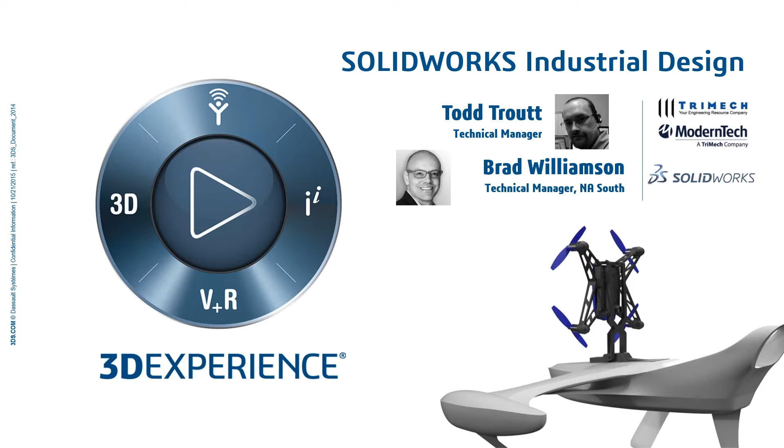Well, I'm going to kick things off if you don't mind, Todd. And before we jump into the product demo, I wanted to first introduce you to one of our customers, Center for Advanced Design. They're based up in the Minneapolis area. Center for Advanced Design, CAD, they are product design specialists. What they're known for in their area is being really creative, very flexible, very responsive to their customers. They do everything from product development through manufacturing.

Now, they are avid SolidWorks customers of ours. They've been loyal SolidWorks users, but as industrial designers, they also use a lot of other tools. They use other sketching software, they use other surfacing software, just anything that they need to get a job done for a particular client.

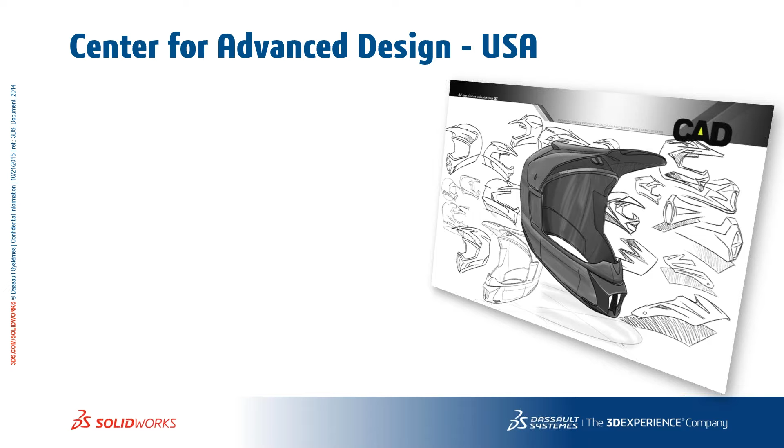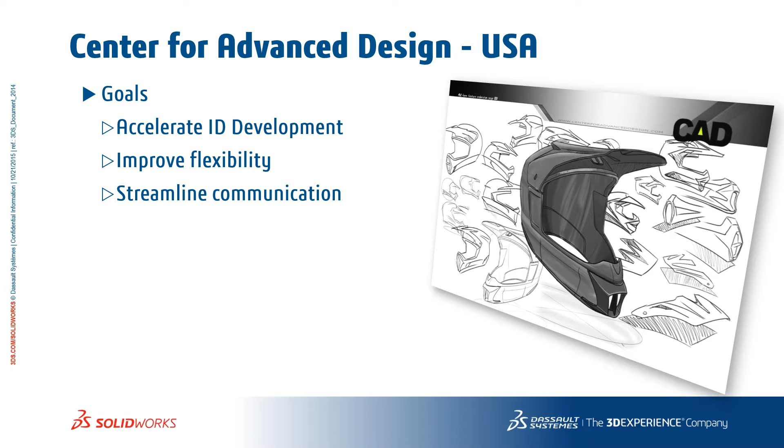So we approached them about a year ago to be early adopters of SolidWorks Industrial Design before this product even hit the market. And when we met with them at first, they identified some bottlenecks in their process and some goals that they wanted the software to do for them. Most importantly, they wanted to find a way to accelerate their industrial design development cycle. They wanted to improve their flexibility and streamline communication internally and with their clients.

And Marc McCauley is one of the co-owners there. He told us that we kept looking for a better solution for bridging the gap between industrial and mechanical design. Now, we're going to come back to Center for Advanced Design at the end of the presentation, and I want to give you a little update on how they made out with their pilot project.

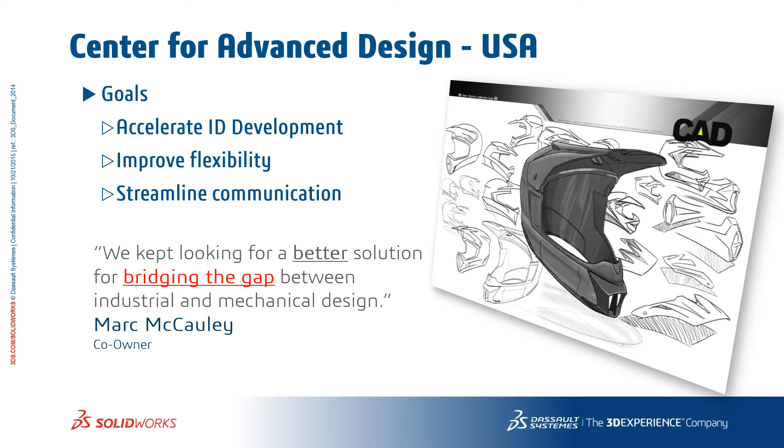Now, before we began the development of this product, we did a lot of market research. We talked to a lot of our customers who do industrial design and got their feedback. We got their thoughts on how they're currently using software in the industrial design process. We repeatedly heard that they use lots of different pieces of software, sketching, surfacing, communication tools, and those tools don't necessarily talk very well together.

They also told us that doing complex modeling in a parametric modeler like SolidWorks can sometimes be kind of tricky, take some advanced training and some advanced skills. And everybody we talked to told us that collaboration and communication was sometimes a challenge, and that's especially when we're dealing with companies overseas, maybe for doing manufacturing where our time schedules don't match up, or maybe we even have language barriers.

So we took all that feedback and we set out to develop a new application, SolidWorks Industrial Design, something that would be complementary to SolidWorks. We wanted to be able to do a few different things. First of all, to be able to model freely without the CAD constraints of traditional parametric modeling. We wanted users to always be connected to their data so they could access it from any device, any location.

And we also wanted to find a creative way that they could harness social media trends and a collaborative type of experience where the internal and external stakeholders in a given project, maybe the team members, maybe the clients, maybe even the suppliers, could all communicate with each other on a single platform. And finally, we wanted a product that was a complement to SolidWorks, so not yet another disconnected application in that process.

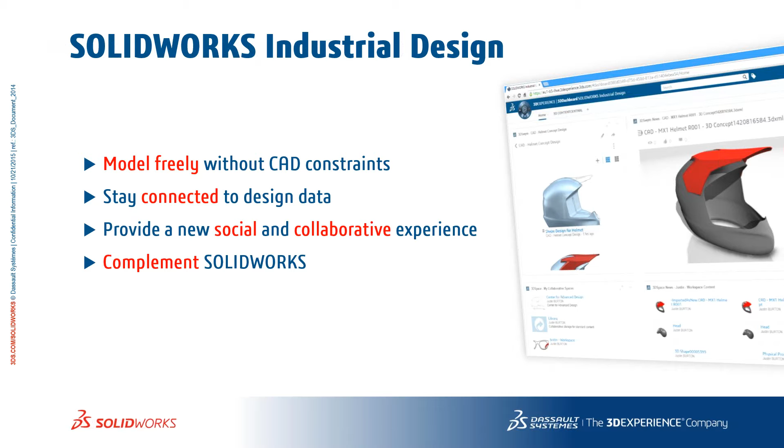So many of our customers gave us a similar feel for what their typical industrial design process looked like, and it was surprising how similar people's processes are. Conceptual design almost always starts with some kind of a hand drawing, hand sketch. That step is probably never going to go away. And the great thing about hand sketching is that it's very low cost. You can try out lots of different ideas on pen and paper, or maybe a piece of software.

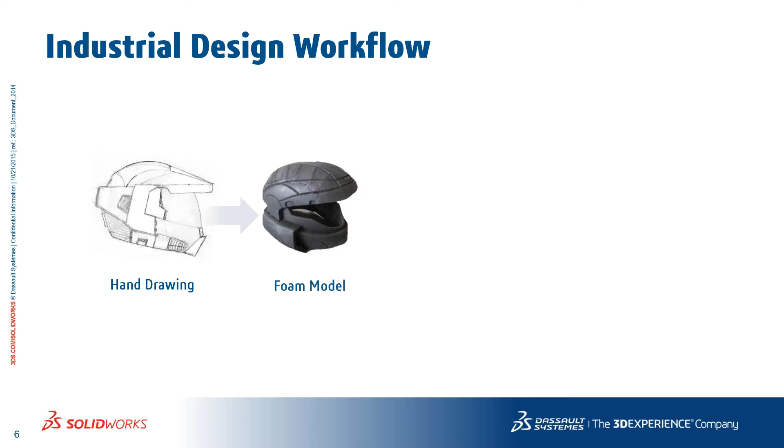Now, one or two of those concepts are generally going to float to the top and become the most popular, and then we might commit to a physical prototype, maybe a foam or a clay model, maybe even a 3D print. Probably we'll try to do some kind of a 3D model of that, maybe using some kind of surfacing program to make those complex shapes, but inevitably there's going to be a parametric CAD solution at the end of this for detailed design. We hope it's SolidWorks, and for most of our customers, it's SolidWorks.

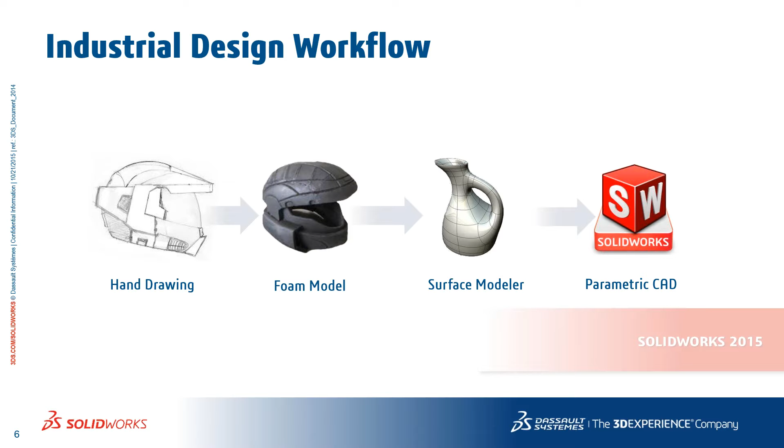The challenge to this workflow, though, is that you've got a lot of disconnected solutions on the front end of that process before you even ever get into doing the detailed design. We're using lots of pieces of software, lots of disconnected processes, and so that's what we thought we could affect: that part of the program by making one single piece of software that would simplify that workflow.

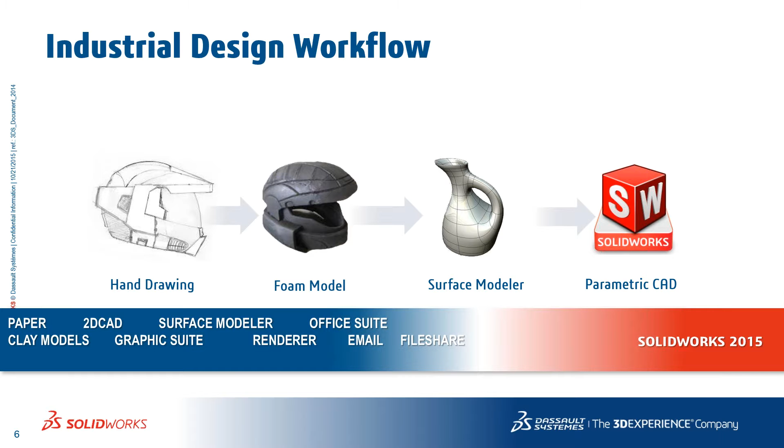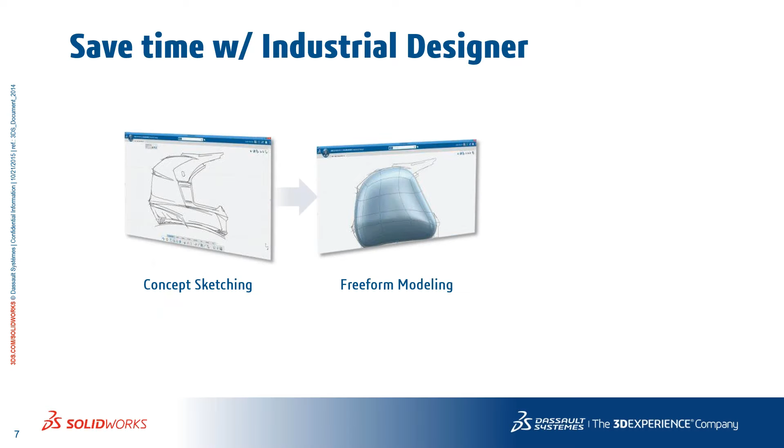So what we propose to do is accommodate many of those initial steps in that process. So you can do your concept sketching freehand. You can do your freeform modeling, even some parametric modeling, but then have a smooth on-ramp into SolidWorks for finishing out that detailed design. So the goal here is a nice smooth workflow, two complementary apps that will talk great to one another and really minimize the set of tools that are involved there.

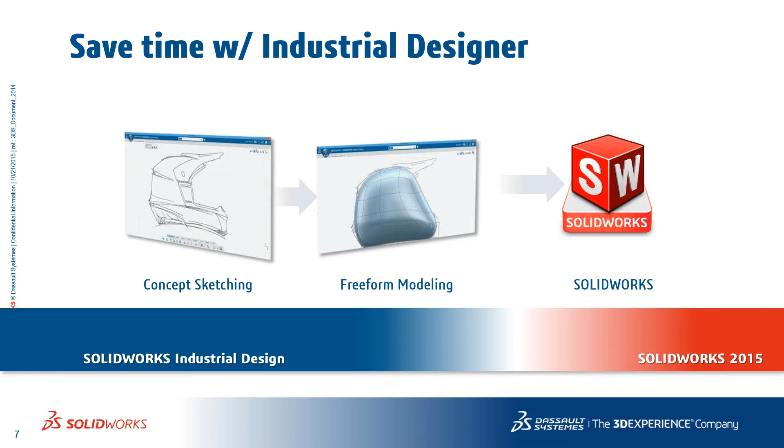Thanks, Brad. So in the next few minutes, what we're going to have Brad do is demonstrate this typical industrial design workflow, and he's going to come up with an ergonomic and stylized design for a mouse, for just a normal computer mouse. So he's going to take you through those 4 steps. He's going to spend about 5 minutes at each step along the way. But first, he's going to need to sketch out some ideas, like he talked about, the hand sketching type of thing that was traditionally done.

After that, he's going to be able to go and sculpt a freeform shape based on those 2D sketches. And then after he has the 3D model, he's going to be able to share that design concept and look for some feedback with a collaborative team. And after that, he's going to be able to refine the details for a production model. The goal of the concept phase then is to answer the question, will it work, and what is the best idea that we can get to move forward before we're investing time in the detailed CAD model.

All right, so to get things started, Brad's going to begin the project with some basic ideation sketching. The same kind of thing that you typically do with a paper and pencil or pen, or maybe a standalone drawing software. Only this time, he's going to use SOLIDWORKS Industrial Design connected to his tablet to do some freehand sketching in a 3D work environment. Brad, go ahead and show us what you have in mind. Yeah, I'll be glad to jump in and do that.

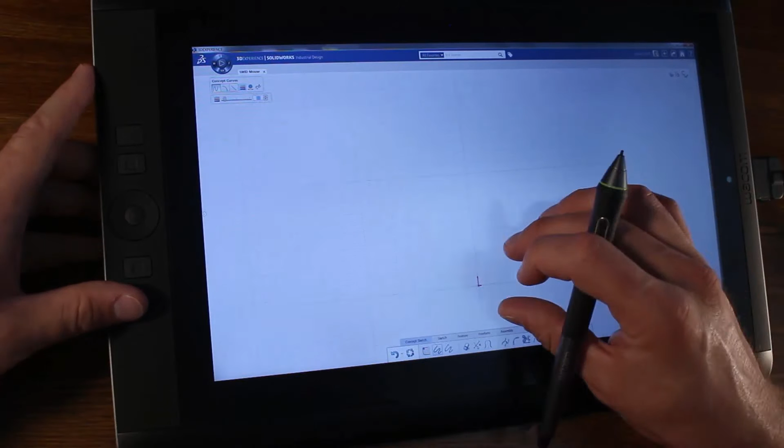Of course, the software needs a Windows computer to run on, and the tablet will then serve as my secondary monitor. So I'm going to jump in, and I've got a webcam showing my tablet in use here, and you'll see me just start sketching. I'll just use some touch gestures to manipulate the paper in the workspace, and then just use the stylus to start roughing in some hand sketches.

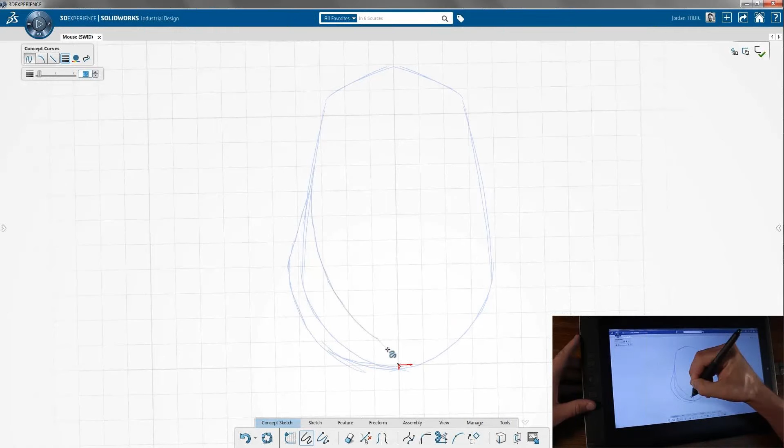Now, I can take advantage of some software accelerators like mirroring and erasing and things like that to make it go a little bit faster. Let me split the screen now so you can see sketching in Industrial Designer, and you can also see that the tablet's still in use there. Just rough in the basic shape here. If I make a mistake, I'll just flip the pencil over and it becomes an eraser. Or, like you're familiar with in any sketching software, we can just swipe over some of those strokes and get rid of them. Want to also add in a little bit of detail here where I think the button profile is going to go, and also sketch in what that wheel is going to look like.

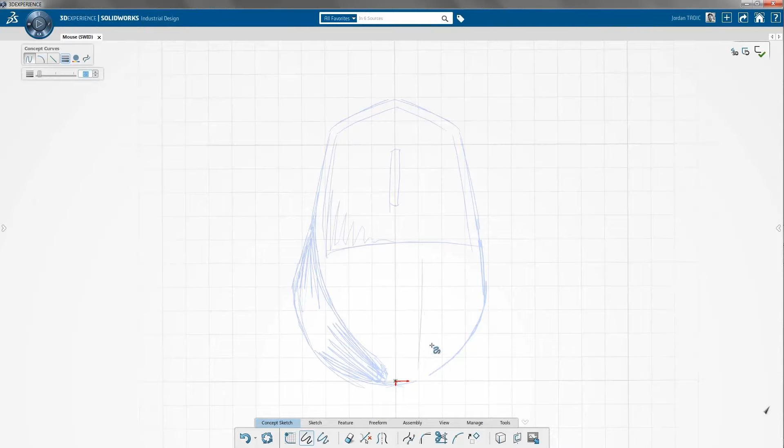Just rough in a few more strokes here, maybe scribble a little bit to imply some texture, some shading. Give it a little bit more of a stylized type of a look. That's looking pretty good. So we're just roughing in the shape here, but what I'll do next is change my pen color, change the pen weight, and now I'll come back over those rough strokes with a bit more confident trace strokes here to give it a little bit more form. Now, I'm always sketching in a 3D mode, even though we happen to be projecting on a single plane.

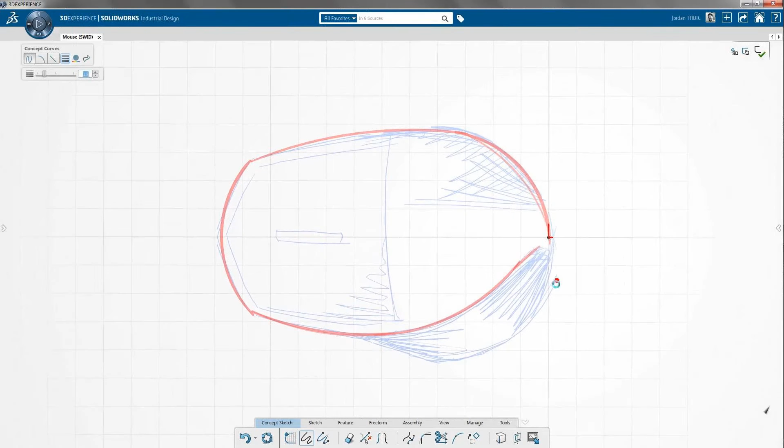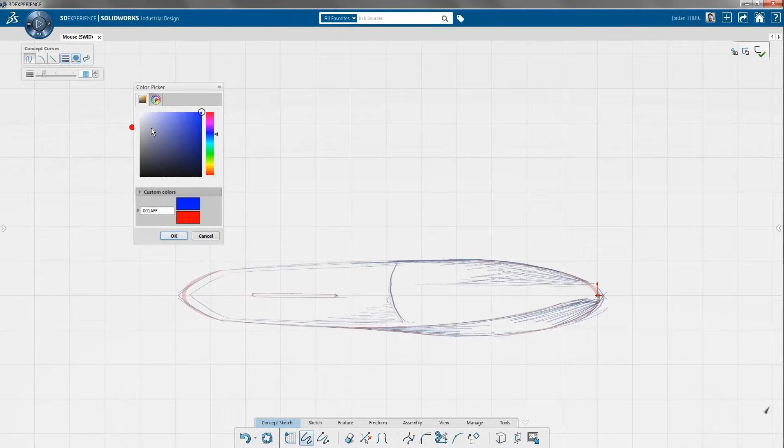That makes it really nice for being able to rotate around and get any kind of view that I want. The tablet is great. It's pressure sensitive, so it's really capturing the feel that I want to capture. Let's see. I'll flip over into a side profile here, and draw another sketch. And what's cool about this is sketches work basically like layers would work in any other kind of a drawing application. So I can have multiple sketches that represent either different positions or even different concepts.

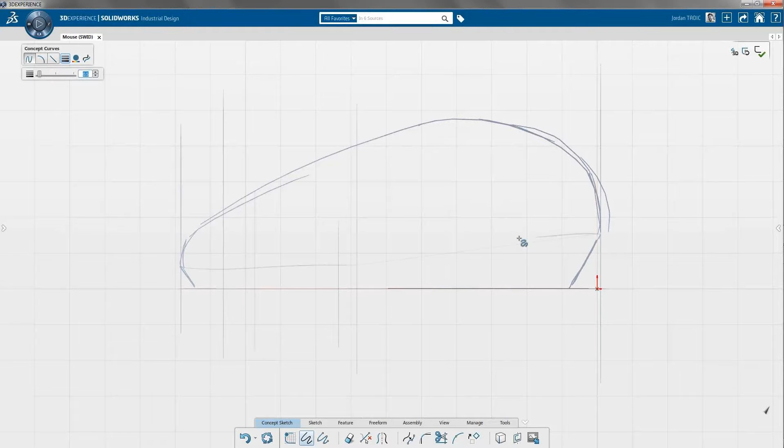Now to get this side profile, I'm just going to draw in some vertical lines, and that gives me some reference locations. Now I'll sketch in the side profile here, what I want that to look like. That's pretty good. I'll kind of rough in what that parting line should be. And then we're going to need a thumb groove on one side. Let's imply a little bit of contour, a little slope there, get rid of some of these mistakes. And then once again, I'll go back to that red pen with a little bit thicker weight and just add a little bit more confident, bolder strokes here.

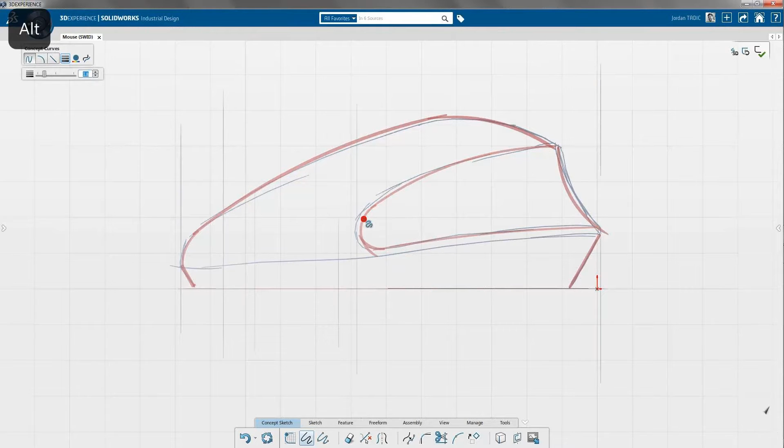And I also have some sketching aids too. So if I hold down modifier keys like Alt, for example, Alt will snap to perfect arcs and circles, and Shift will snap to perfect lines like you're accustomed to in other drawing software. So we've got now two pretty decent orthographic views. I've got a top view, I've got kind of a side view, and if I rotate out to a little more of an isometric view, it almost looks 3D, even though this is just 2D sketches. And this might be a good starting point just to show to the customer and see if we're going in the right direction.

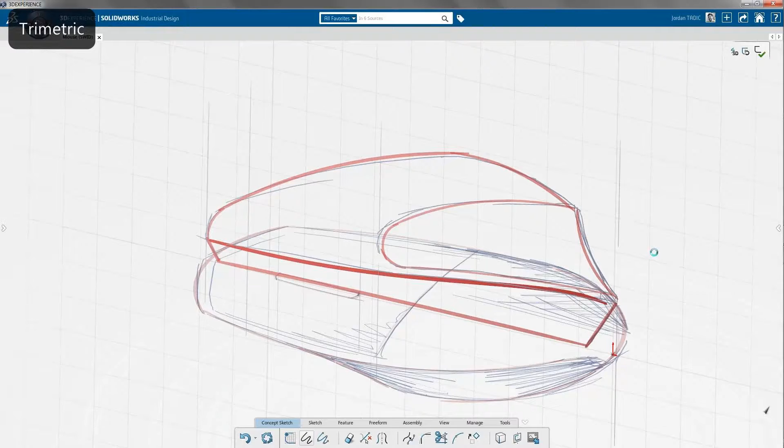All right, cool. So, that was just, I got to say, some good sketching and nice job there on the good-looking mouse, really. But in just a few minutes, Brad's been able to rough out those ideas or those ideation sketches. It's kind of like a digital napkin or maybe a design notebook that you would have.

And if wanted, you could take it a little step further. You could incorporate photos, image files, maybe even some 3D geometry. It's no problem for SOLIDWORKS Industrial Design. Sketching then is fast and easy, and it means you can quickly capture your ideas and just as important, create multiple concepts. Now, before

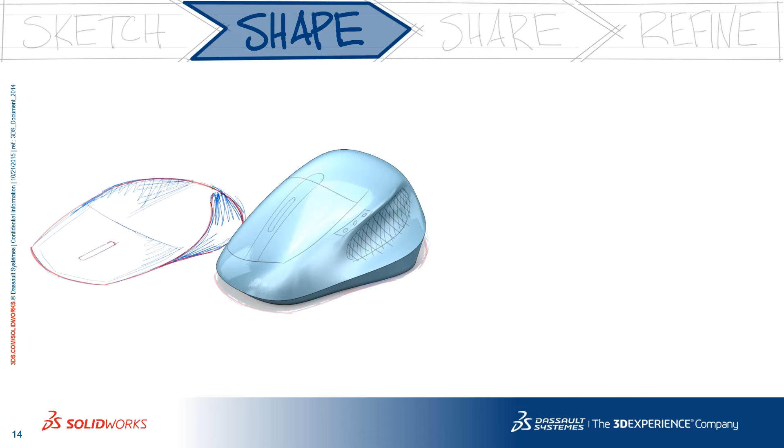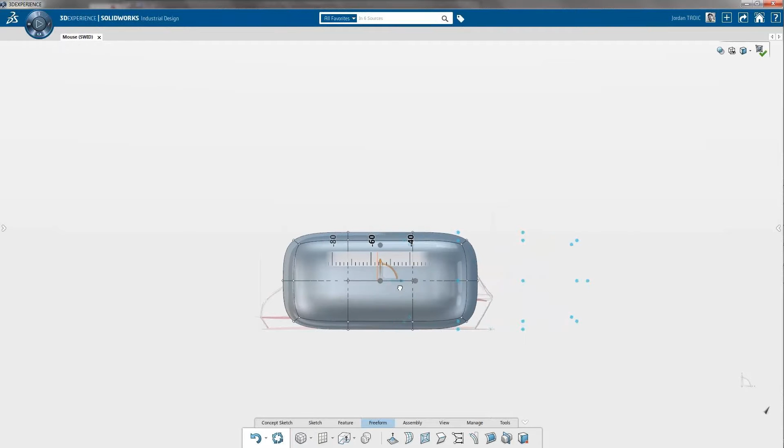Sketches, those are pretty useful, but if we want to really visualize this in 3D, we need to get some kind of a model. Now, what's different about freeform modeling in Industrial Design versus traditional parametrics is that we don't have to use a lot of complex surfacing. Instead, I'm just starting with a basic shape like this cube. And then I can just manipulate the cube by translating it, scaling it, pushing, pulling, and just watch how quick, with just a minimum number of moves, I can basically get that bar of soap kind of shaped into a mouse. It's going to look pretty cool here.

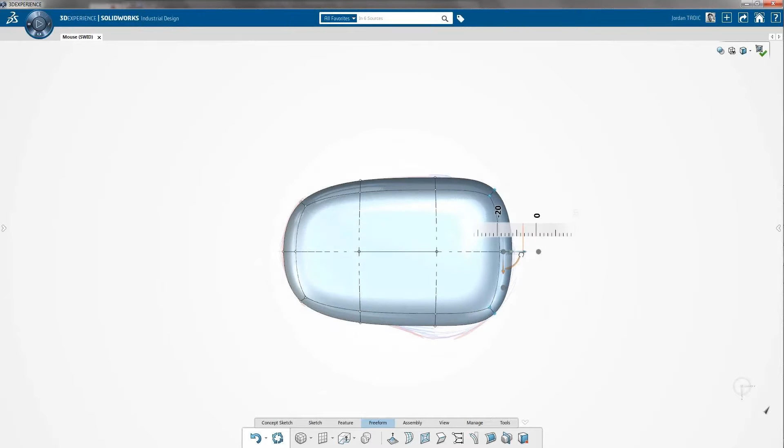I'm going to use the triad. You'll see me use this triad a whole bunch of times. I'm just going to grab some different control points and push and pull on it. That tool, that one tool, lets me scale, rotate, and translate, all with the same interface. So I don't have a lot of complex tools to learn. Because typically an industrial designer, they're not necessarily a CAD expert. They don't spend all day modeling in 3D. They do a lot of different types of jobs. So we wanted a tool that was easy to use.

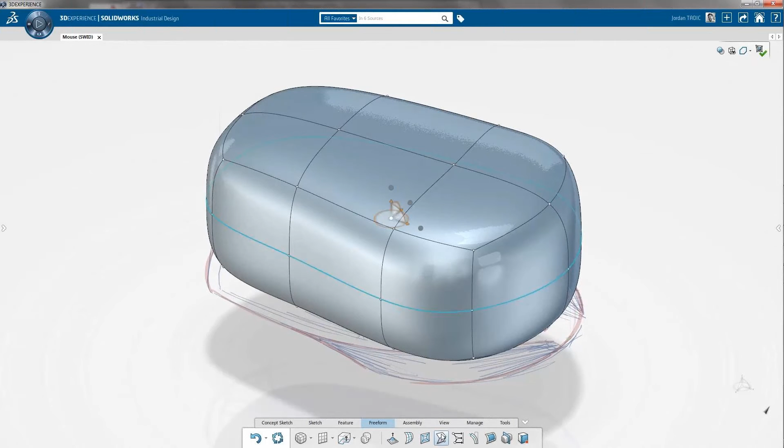Now I've got the top view looking pretty good, and everything's nice and C2 curvature continuous. But sometimes we want a hard edge, like where we have a parting line. I want a nice hard edge along the bottom, for example. So I'll just pick on the edges around the bottom of my block and turn on the crease feature. And so the crease just makes it into a nice hard edge.

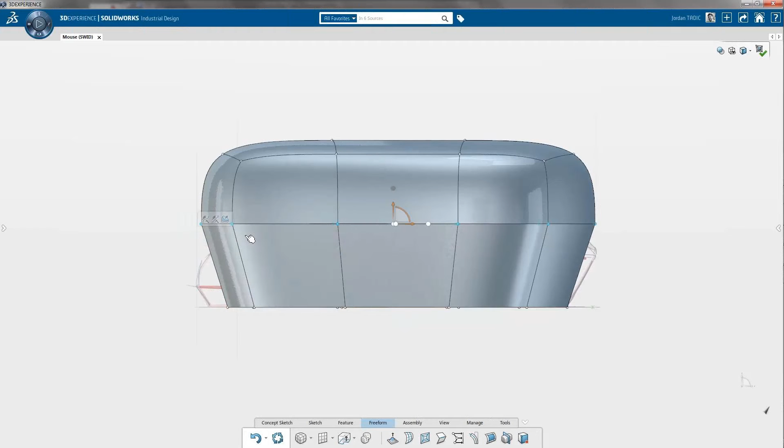That's great. Now if I look at this in a side view, I want to get that nice beveled type of a profile. So I'll grab that scaling tool right there on my manipulator, grab the parting line, translate it down a little bit, and I want that to have a little bit of a swoop to it.

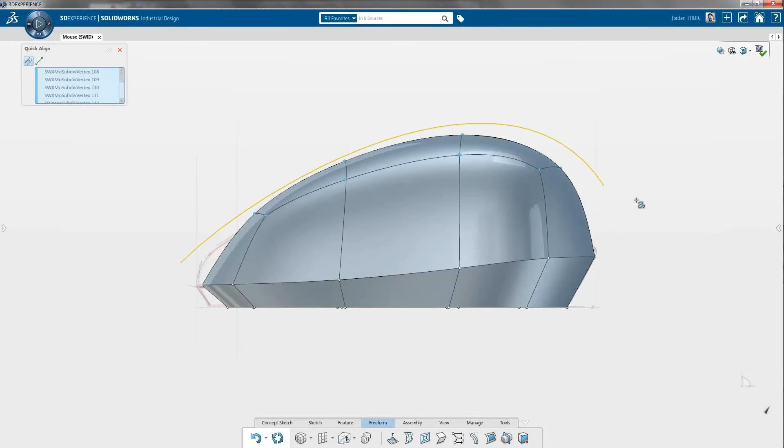So watch this. I'm going to use this patented tool called Quick Align. Quick Align lets me swipe with my pen here on my Wacom tablet, and whatever I draw, it snaps the freeform control points to my pen stroke. And it stays active, so I can really iterate and try out lots of ideas really fast without having to keep reselecting and going back to the command.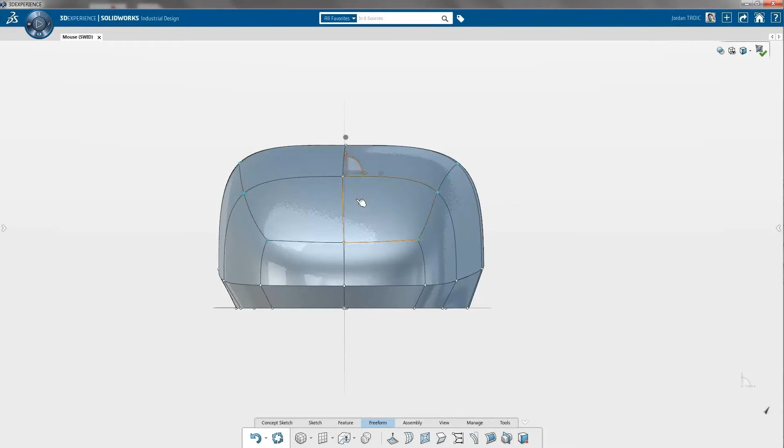So after a few little pushes and pulls on this, I'll make a couple more fine adjustments, and I just continue working my way around the model. Let's go to a side view, grab a few control points, use that manipulator. I'm going to orient the manipulator here so it's sideways to the screen, and then I'll just scale that in a little bit.

There we go, got a nice taper to it. Drop it down just a hair. Everything is maintaining a nice C2 curvature continuity also.

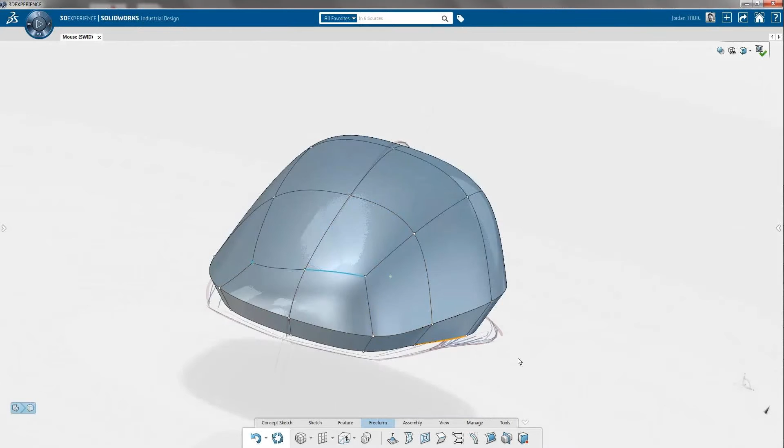So I've got kind of an asymmetric design happening here. We want this to be a right-handed mouse, no offense to left-handers out there, but we want it to have a little asymmetric styling here. Just continue pushing and pulling on this a little bit.

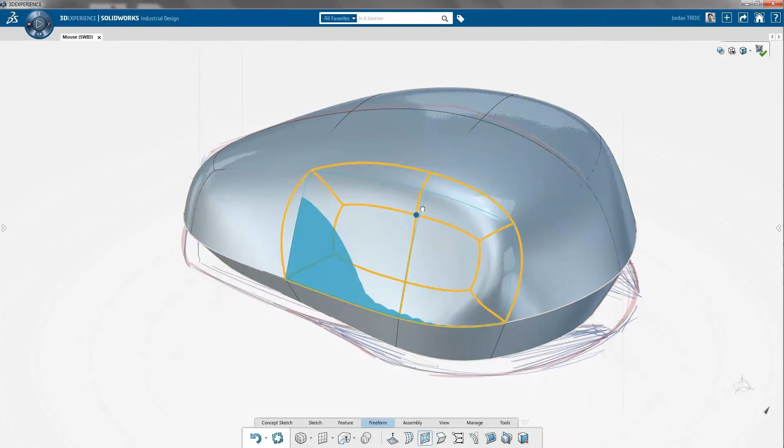You can see how I was able to just, with a few moves, get that style kind of matching the hand sketches underneath. Now I need a button or a little thumb groove recess here, so I'm going to turn on a tool called Subdivide. And what that does is takes those larger faces and breaks them up into a series of smaller faces.

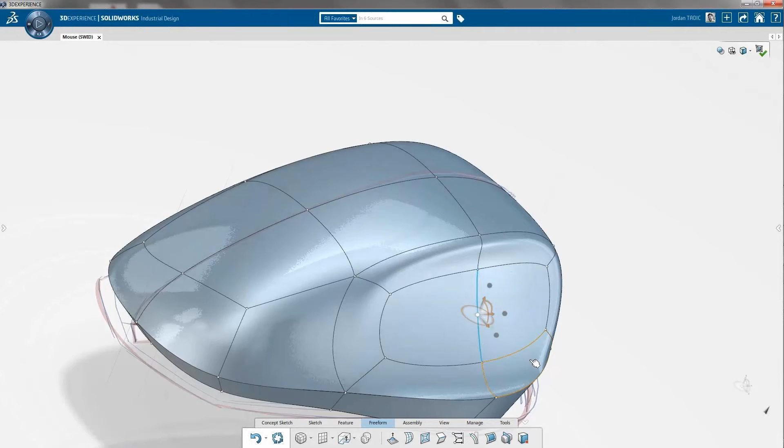So it just gives me finer and finer control depending on how many subdivisions I want to make. It's almost like adding control points to a spline. You draw a spline with a minimum number of control points, and then you just keep adding necessary points to give you the fine control that you need.

And so just one little subdivision there gives me that ability to take that thumb groove, kind of push in on it a little bit. You see how the curvature is being maintained there? It's got a nice flow to it.

I'll turn on some transparency. That way I can see the sketches underneath and make sure that I'm just staying true to that original design language of that underlying 2D sketch.

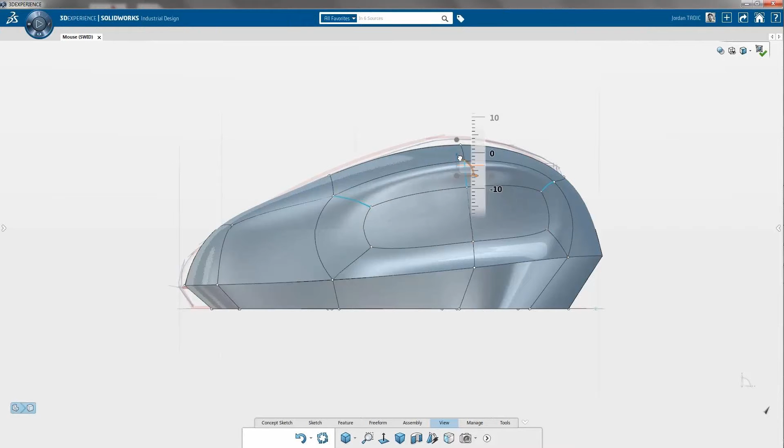But I'm pretty far along. I could probably continue tweaking this a little bit more and just pushing and pulling on the shape. But this is coming along pretty well. I've done a good job of staying true to my 2D sketches. So I think this is a good point where I'm ready maybe to start pitching this to the customer.

Awesome, I mean that looked really pretty straightforward. You've done it in record time, I guess. I mean it looked so easy. But that freeform modeling tool, it's so cool, kind of like a virtual model shop, right? It was like you had that model of clay that you could just manipulate or push or pull and carve on.

So, and then you had the tools though like crease and the patented quick align tool, right? That you could take just about any organic shape, anything you can imagine, and create it without having to be that CAD expert, right?

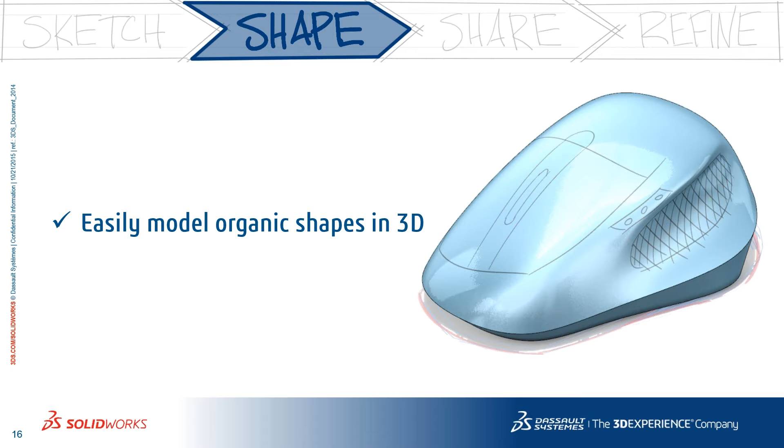So he said he's ready for some feedback. In this next scenario that we'll set up, he's reached that point, and he wants to get some input from the team before he goes any further. Now, this would typically mean saving screenshots, maybe editing some images, attaching pictures and files to an email, and just on and on. But you're going to do that to start the discussion typically, and that's pretty common. But it involves at least two or more different pieces of software that aren't integrated together.

So in contrast, you'll see what Brad can do by starting a private discussion thread and inserting snapshots in his model to share with the client, all without ever having to leave the modeling app.

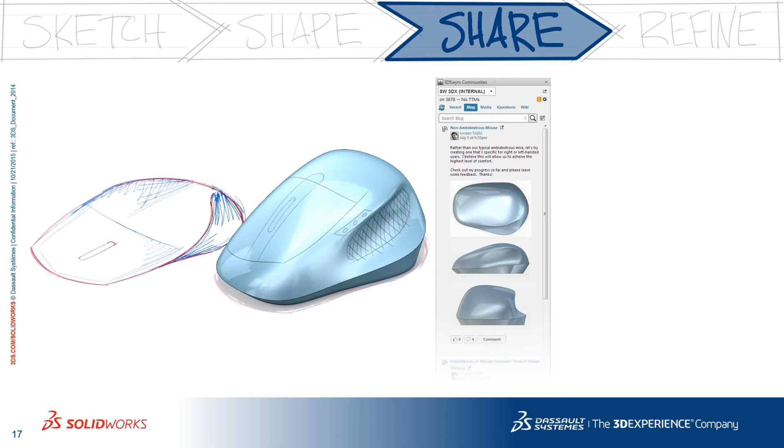Yeah, exactly. So many customers told us that communication was kind of a struggle. Live meetings, difficult to get everybody in the same room. Email threads, difficult to keep track of. So why not leverage things that we do every day, like take advantage of social media, for instance.

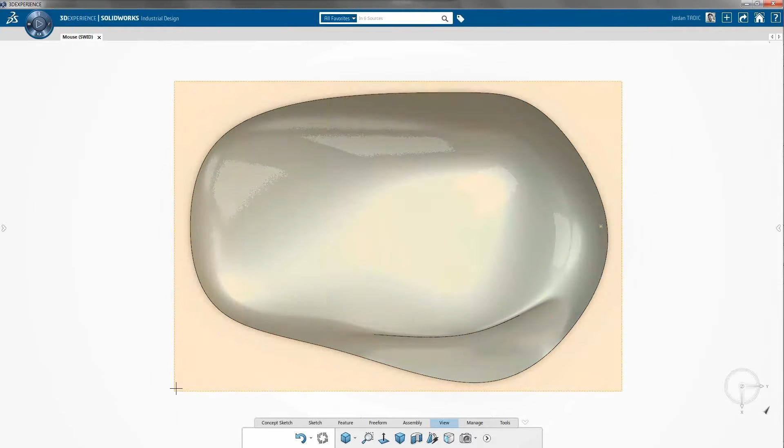And so we've embedded our own little social media platform right into the modeling application. And by creating these private discussion threads, we can invite whoever we need to this. It might be a client, might be members of our design team, and create a discussion thread.

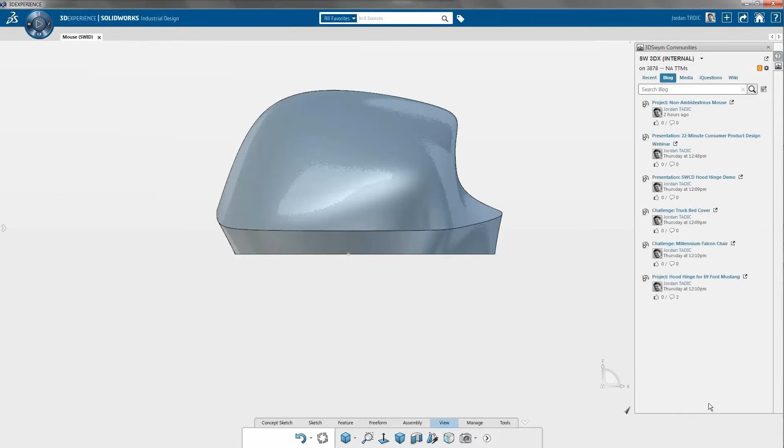So I can add my comments, attach files, attach media, and now I'm just going to window select and grab a few screenshots of my active workspace. And you see how it just pastes those right in, and I'll just publish that comment. Now all the members of our team are notified, the ones that we've subscribed to this thread.

So now you're going to see a little scenario where Mark, one of our collaborators, he's on his Android phone here.

He can log right into that private, secure community, and right away he can see my comments and see the images. Optionally, he could even use a 3D viewing app to view the 3D model. So Mark's going to add a couple of comments, and he says he wants to sketch in some details for some finger grooves and some buttons.

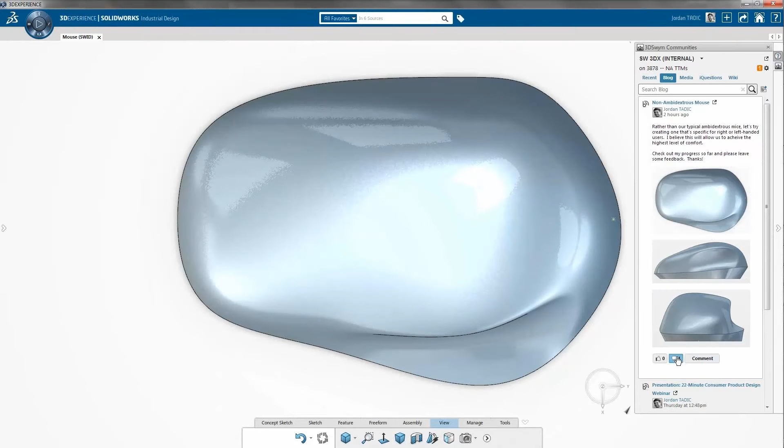So I'm going to take a look. I'm still here in the modeling app. I take a look at the comments that he's posted. They're updated in real time, and I'm going to start drawing a sketch for what I think that button layout should be. Now what's unique about this sketch is that I drew directly on the 3D model.

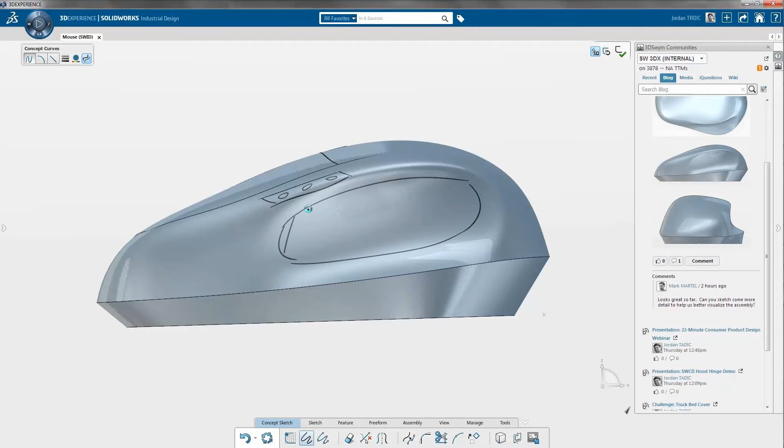The point being here is that in that concept phase, you don't always want to commit to 3D features, to complex modeling, when maybe a 2D concept is all you need. So we combine that 2D hand sketching you saw me do earlier. We now give you the ability to do that directly on the 3D model, almost like having a Sharpie and you're marking up a physical prototype or a 3D print.

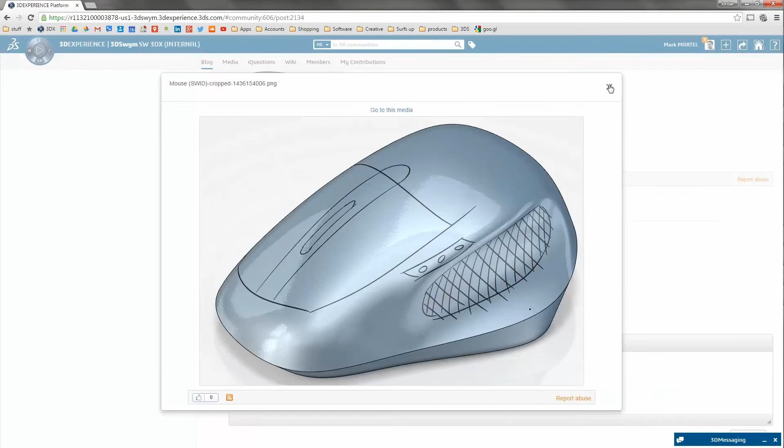So I rough in where I want that overmold to be and the buttons, and then just as seamlessly I can grab a snapshot and post that right to our design community. Now Mark can either view that on his mobile phone or get back to his PC and log into any browser, log into that secure community, and all of the discussions track right along with any of the members we've invited to this discussion.

So what's going to happen over time is that we're keeping a record of the evolution of the design and the decisions that have been made as this design moves forward. A really great way to consolidate and get away from file shares and email threads and other disconnected types of apps.

What do you think, Todd? Really cool. More tools that are just really groundbreaking as far as sketching on the 3D model, and having that all in one platform, one environment. And you said the data is always secure and up to date. So when you're doing that design, you're changing quickly, but you can concentrate on working together and not managing those files. So that takes that out of the way.

The built-in tools that you showed, it's convenience as far as a platform, sharing feedback, preserving that history as the design evolves and gets multiple concepts. And the way you were collecting feedback, posting that to the team, instantly being able to incorporate those changes, that was pretty cool. And industrial designers combining the tools to design, then share and discuss with your users, and they were on any device.

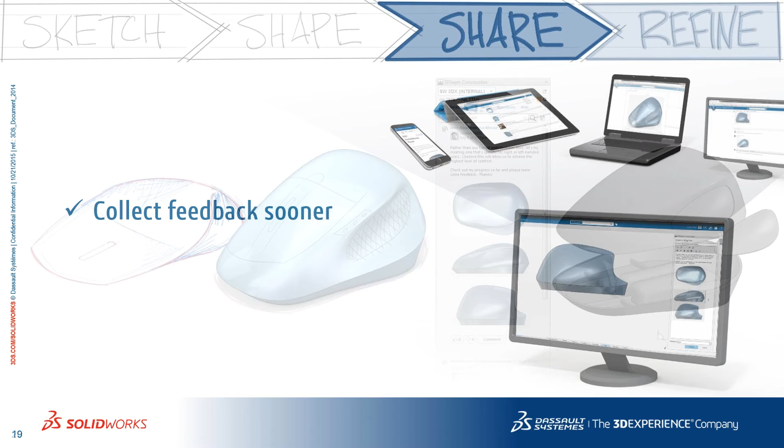All right, so once we've got the feedback, we're making really good progress. At this point, you could print that in 3D right from SOLIDWORKS Industrial Design. But let's say the team's happy enough with this concept and wants us to go ahead and add the manufacturing features.

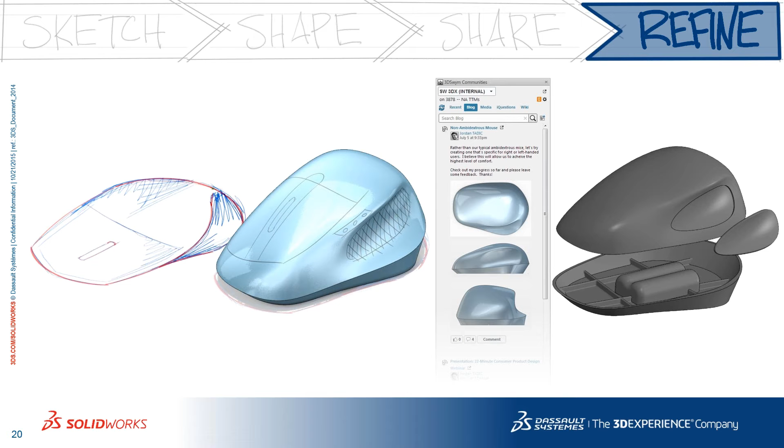So to do that, I'm going to have Brad open the mouse up in SOLIDWORKS, where you can check for manufacturability, add the internal shell and ribs and pockets and things like that, maybe even get him to create the tooling split. When he's done, watch how he's going to be able to post that progress to the discussion thread.

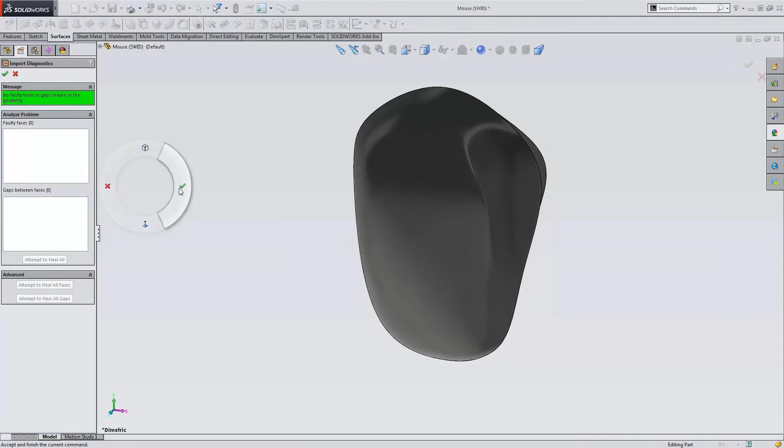Industrial Design is a complementary app to SOLIDWORKS because chances are they're potentially two different users. So we've got the industrial design taking place here. I'll save that out, and then let's just open that up in the best parametric modeler on the planet. I think that's SOLIDWORKS. So here comes our model in SOLIDWORKS 2015. It opens up as a beautiful watertight solid. There's no issues like I would have with other disconnected surface modelers where there's translation issues.

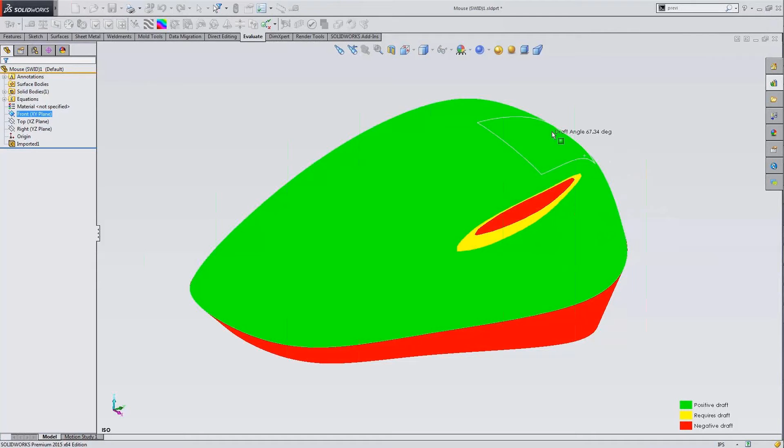And now I can take advantage of what SOLIDWORKS does best, and that's detailed design for manufacturability. So I can look at curvature, do draft analysis, look at zebra stripes, and study the form, the curvature, test it for manufacturability. This is all looking really good.

So I think at this point I'm ready to start designing some tooling features. SOLIDWORKS has a ton of great tooling design features that will help me create the tooling split. It grabs that parting line, turns that into a parting surface. We'll need this to be a hollow part, obviously, so I'll turn on the shell feature. Let's give ourselves about 50 thousandths wall thickness.

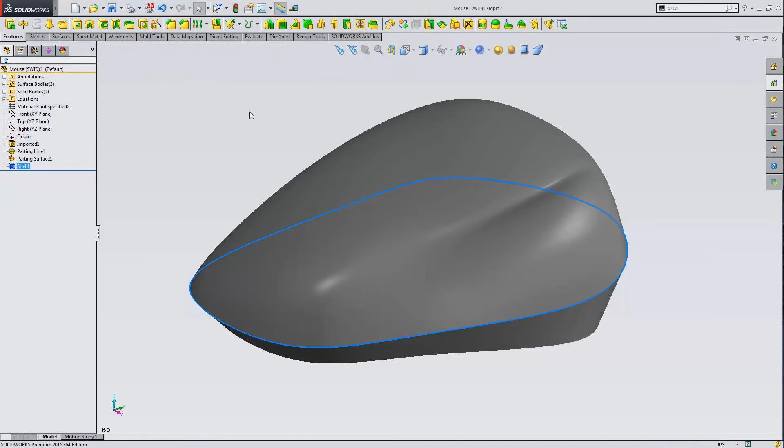Turn on the cross section, just drag through that with the section view tool. Looking good, constant wall thickness. Everything is looking like we want it to here. So now I'm happy to use that parting surface and generate the tooling splits.

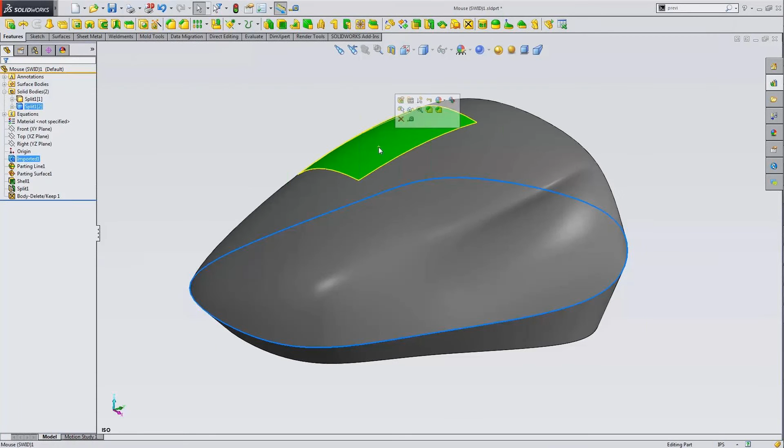We're going to split it into two bodies. SOLIDWORKS does a great job of this. We've now got two separate pieces. Now I can isolate the top and the bottom. So in this bottom cavity portion here, I'm going to draw in some stiffeners.

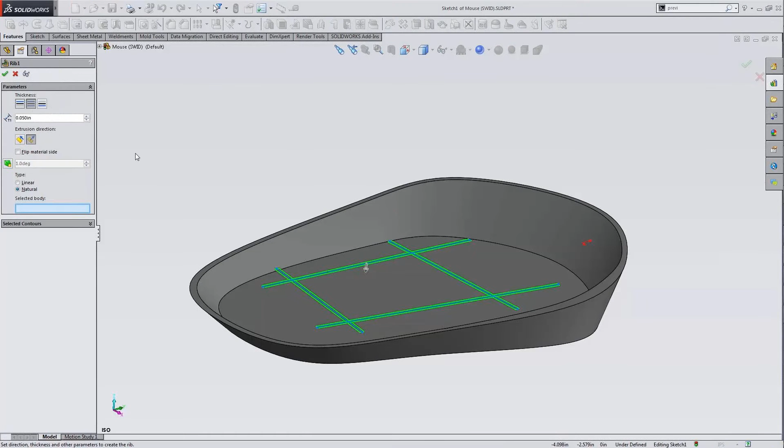Purpose-built tools for manufacturability, that's what SOLIDWORKS does best. Let's draw some lines, and this is just going to be a little network of ribs. The rib feature will automatically extend those lines until they reach a boundary. I don't have to worry about it. I just give it a thickness.

That's looking good. I want to smooth off those round corners, so I'll just touch that top face and it'll round every sharp edge on those ribs. About 20 thousandths, should look pretty good.

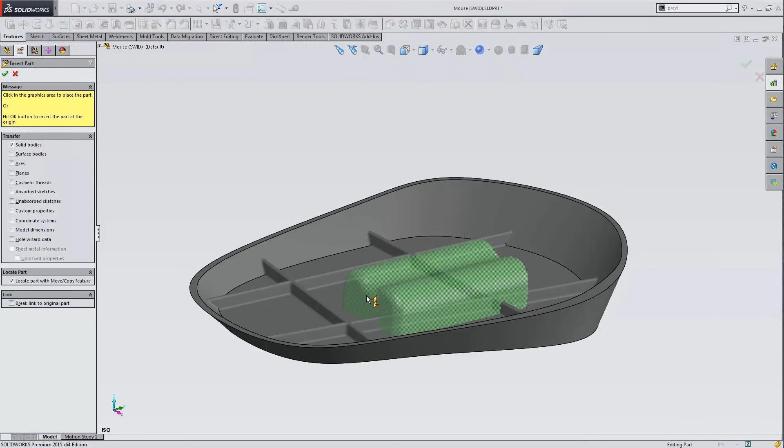Yeah, nice. Now we use a lot of the same types of features in our consumer product design, like battery packs and such. So I've got a little library feature of an AA battery pack. I'm just going to drag and drop that in and then use another one of those specialized features in SOLIDWORKS called the indent feature, which takes that battery pack and kind of pushes that into the model and deforms around it. So I've got that tooling feature already built in, looking good.

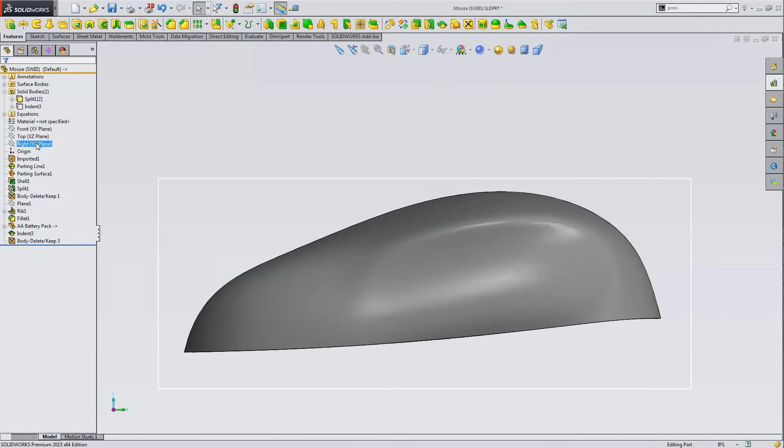Now let's take a look at the top half. So I need to create a little overmold in that thumb groove region. I'll just sketch up a spline, push and pull on it a little bit. That form's looking pretty good. And I'm just going to use that spline to project onto that complex curved shape of the mouse.

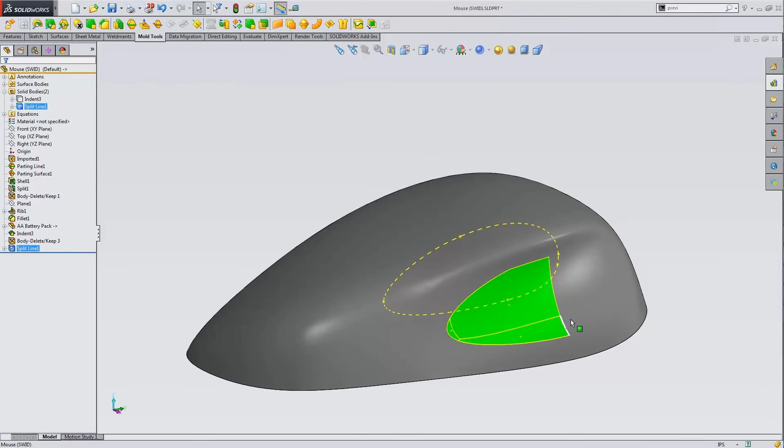Now once I've got that projection on there, I can take all of those split faces, combine them into one, and I'm just going to use that as an indentation feature. So we'll just cut right into the model.

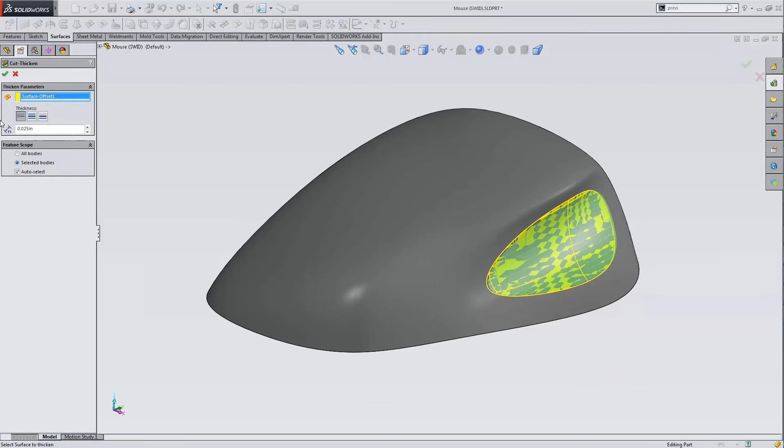20 thousandths, 25, something of that nature. Looks pretty good. Tell it the direction I want to go, inward, not outward. There's my 25 thousandths, and that looks pretty good.

Now we'll take that exact same shape and I'll just copy that interior surface, and this time instead of cutting into the model, I'll project outwards by 50 thousandths, and I'll make that a separate part. So now we have the indentation for our overmold and we have the overmold itself.

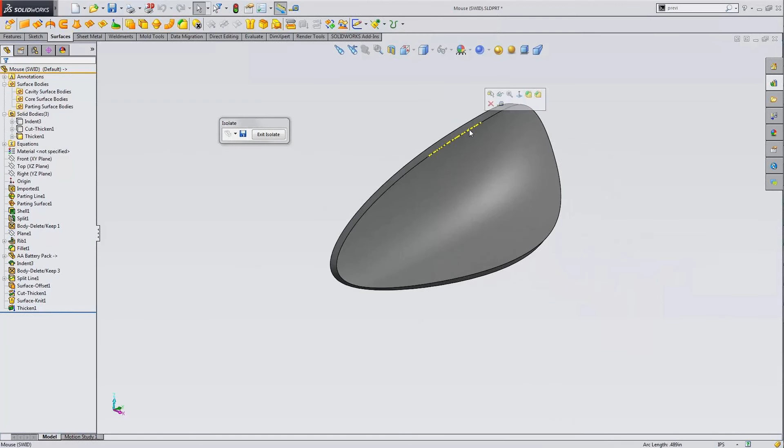I'll isolate that. Let's round off that sharp corner. 20 thousandths or so, maybe 10 thousandths, just a real subtle edge break on that, looking good.

And now I'll show all of the bodies. We've got the top, the bottom, the overmold. This is effortless in SOLIDWORKS.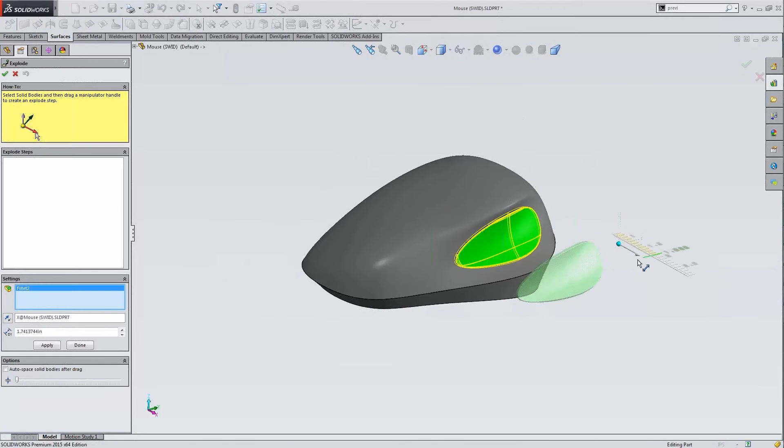And then maybe just for a little bit of flair here, we'll create an exploded view. Let's pull out that overmold. Let's grab that and the top, use the handles to drag it up a little bit. And now we've got a nice little exploded view.

Looking good. And finally, that same threaded discussion tool that we used in Industrial Design is available to us in SOLIDWORKS too, so I don't even have to get out of the modeling app. I can grab a screenshot right here, maybe even optionally attach an eDrawing or a SOLIDWORKS model, and keep that discussion going as the design evolves, and keep getting feedback.

So we'll let our team know that we've made some progress on the initial tooling, and see how they want us to proceed.

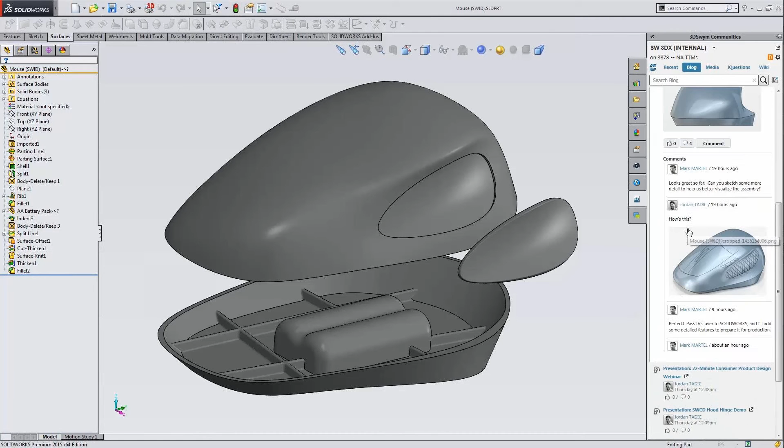Wow, so that's just the perfect complement to SolidWorks for the industrial design process. It was great to see how the model seamlessly and perfectly comes back into SolidWorks. You can put those details in. It's just great. So when it's time to zero in on those designs, Brad was able to finish it out in SolidWorks. What we have is a seamless workflow from concept to manufacturing.

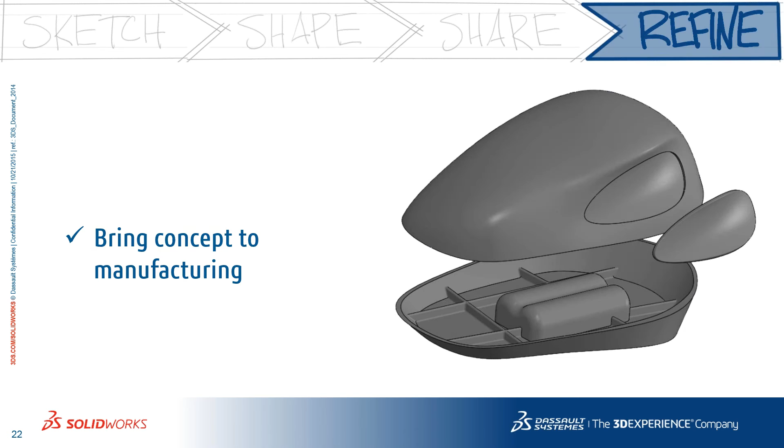All right, so to review, Brad took us through that basic, typical industrial design to mechanical workflow, right? Began by sketching some ideas, capturing them in 3D model space. Then he was able to push and pull on that freeform clay-like model, basically the virtual model shop. And then at each design point, as needed, you can post the progress to the private community and gather that feedback without ever having to manage multiple software apps, email threads, all that kind of stuff. And then finally, made a decision, handed the concept off into SolidWorks, and done the detailed mechanical design. Beautiful.

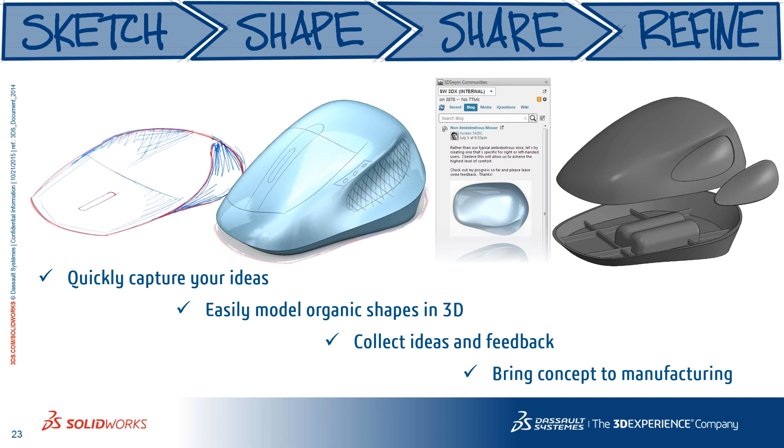Hey Todd, I got to interrupt for just a second here. While you were going through the PowerPoint there, I got another comment on the design community. Okay. And they actually wanted me to go back to the freeform shape and do a little bit more stylizing on it. So I guess before we finish up, maybe the audience would like to see how we would handle that kind of a change. Yeah, go ahead. Okay, so give it back to me.

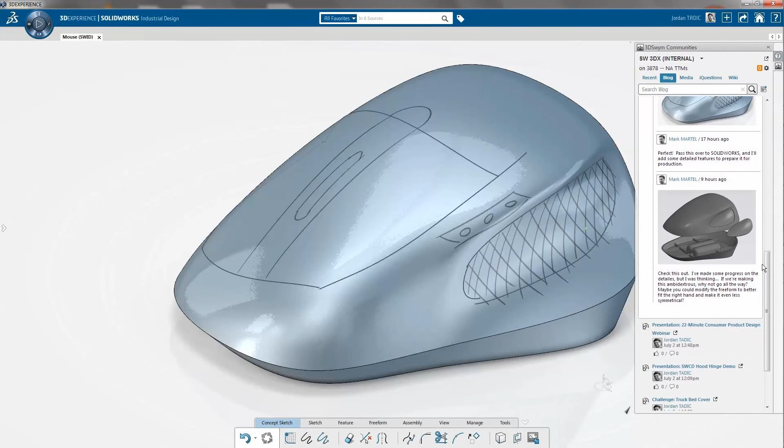I'm going to jump back into Industrial Design. It's a lot like Grandpa always said, use the right tool for the job. If we want to modify that original freeform shape, I'm going to go back to Industrial Design to do that. And it's a lot like if you've ever put an Excel spreadsheet in a Word document. You go to Excel to edit the Excel, and it automatically updates in Word. And that's what I think you're going to see here in just a second.

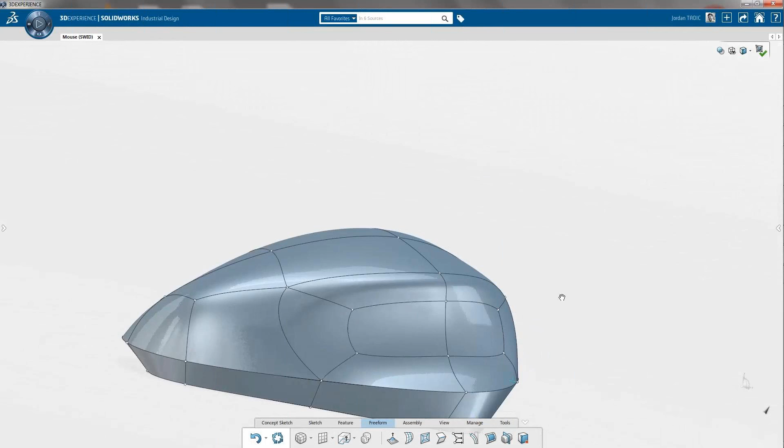So while I'm talking here, I'll just make a few manipulations like you saw me do before. Grab some of these control points, maybe make the styling a little bit more aggressive, a little more asymmetric, making some of those push-pull modifications. And so this is just like editing that Excel that's within the Word document. Once we are happy with the modifications here, I'm just going to save this out as a version 2 of the industrial design model. Okay, so a little more push and pull, slope that in a little bit more.

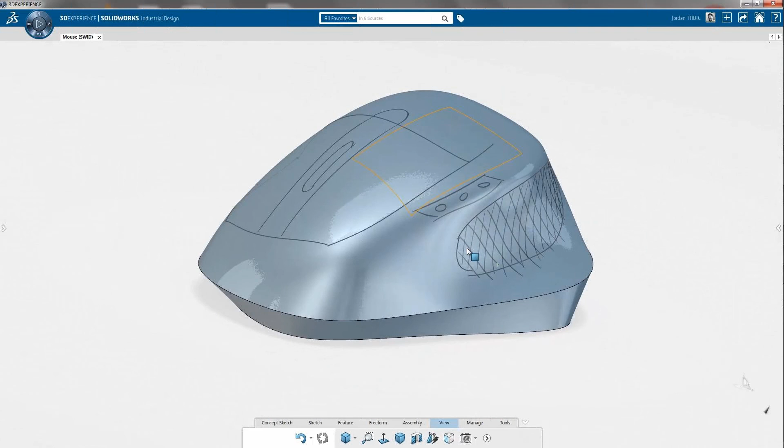Pull that up a little bit. And let's see what they think of that. So I'll save this back out into the SOLIDWORKS format, only this time I'm going to call it version 2. Now back in SOLIDWORKS, all I have to do is update that main body. So I'm just going to point to the version 2 model instead of the version 1.

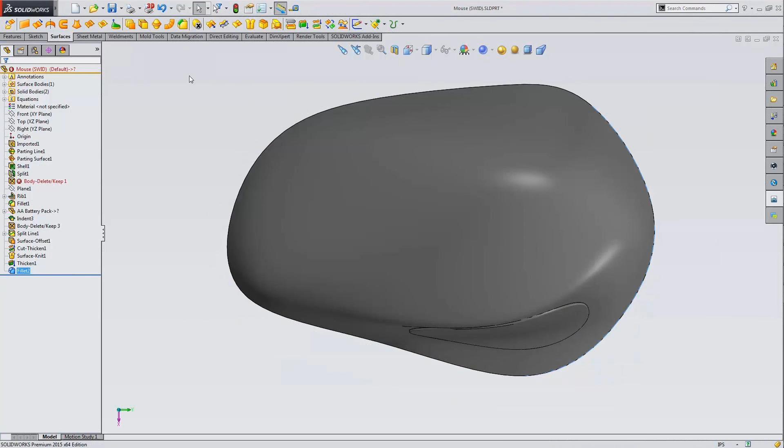Okay, I was wondering if he's going to have to redo all those steps again. No, we don't have to redo it because it just swaps out the bodies just like your embedded Excel file in a Word document. Now, depending on the nature of the changes, you could make it really radical, and then some of those features might have to be edited. But for the most part here, in this case, all the tooling splits updated, the ribs, the fillet, the battery pack, that stuff all updated.

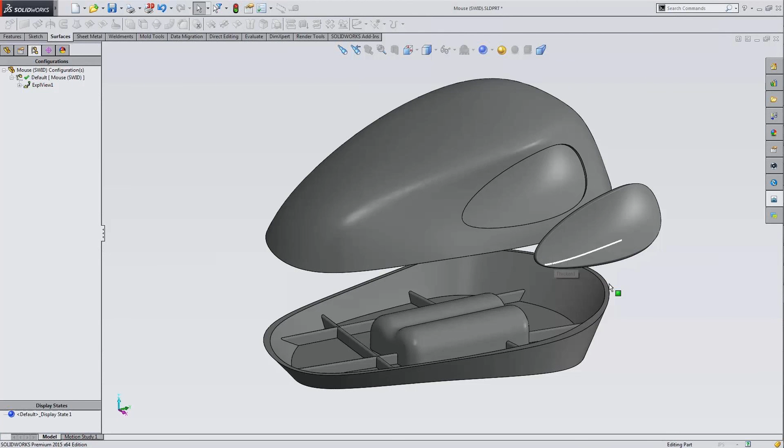And, of course, there's our explode view. And so that's a really good encapsulation of that workflow, how these two complementary apps work together, and they provide you the best tool for each part of that job. That's great, Brad. Let's finish up. We're a little over the 30-minute mark or so, but that's cool.

We've seen great stuff. If we go back to that customer that Brad mentioned earlier, Center for Advanced Design, they were a small design firm. Their business depends on being fast, responsive to clients, and they needed to find ways to accelerate that industrial design development progress. So with SOLIDWORKS Industrial Designer, they actually measured a 60% decrease in their development process. Now, obviously, your mileage will vary, but even half of that number would be a great improvement.

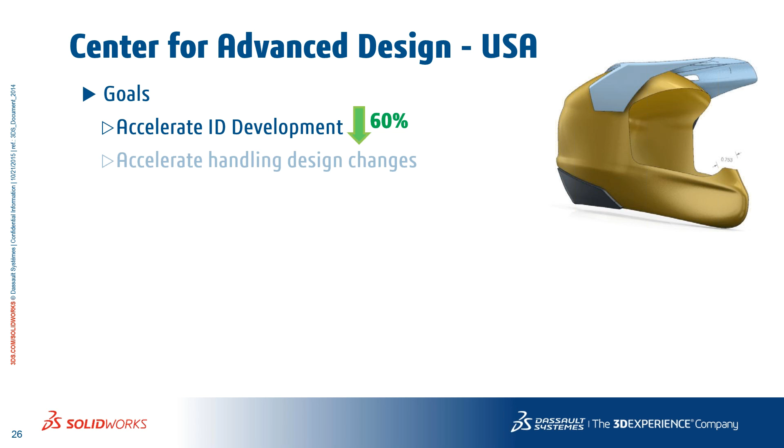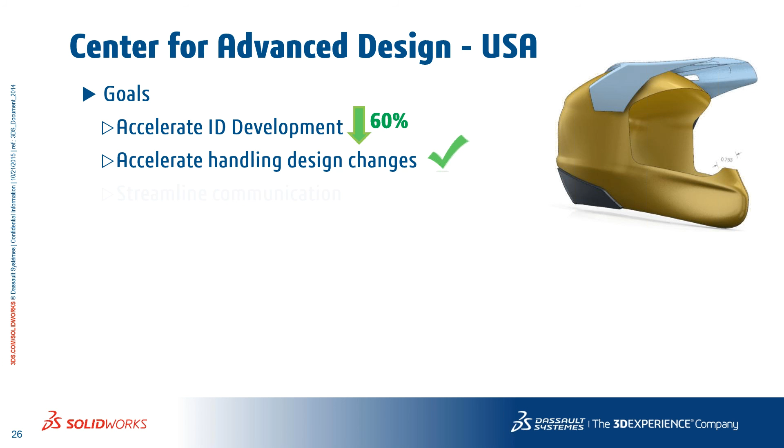Now, using multiple software tools in the past always limited their ability to handle those changes quickly, and they were looking for a better way to streamline that communication with their customers, and they overcame both of those challenges with Industrial Designer. And the co-owner there, Marc, another statement he made to us was that with SOLIDWORKS Industrial Designer, they had everything they needed for their process, from sketching and Sub-D modeling to surfacing, rendering, without having to jump back and forth between applications. So I think that really spoke well for their experience.

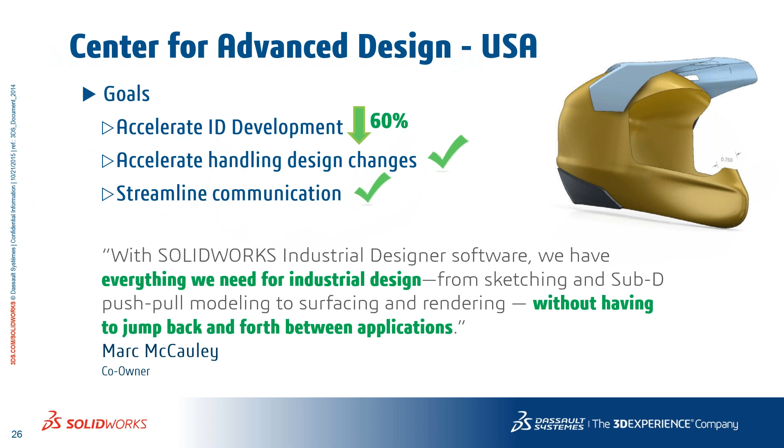You know, the takeaways here is with Industrial Designer, you can do things faster, you can get your designs done faster, you can do more ideas, more options, and that's going to give you the best solution, because really good enough just isn't good enough. You want the best, and you're going to be able to improve your collaboration and innovate more, and that's the name of the game.